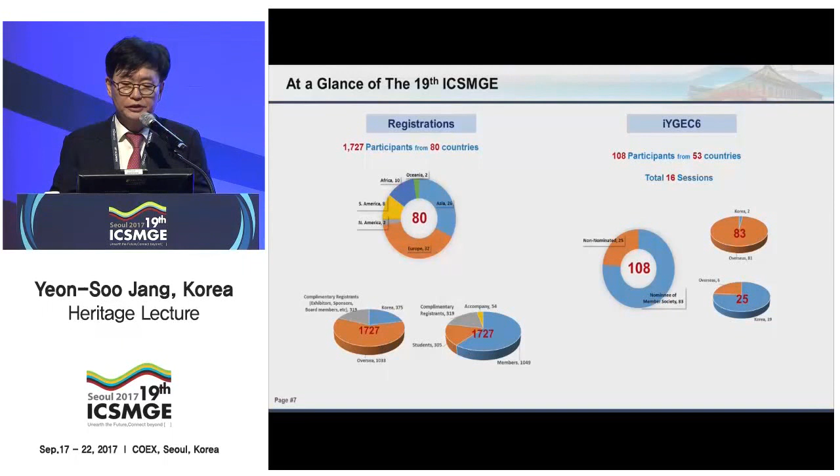Thank you. Now is the time for the heritage lecture. The topic is the geotechnical issues and the preservation of Korean heritage sites. Originally, I intended to show the beauties of Korean heritage structures as well as the geotechnical characteristics hidden in the structures, but I recognized that the time is too limited to show all of this, so I decided to concentrate on the geotechnical characteristics of heritage structures.

Korea has 12 UNESCO World Heritage properties. That is a palace and shrine built in the Joseon Dynasty, and a fortress and castle from the ancient period from AD 500. And locally, the Gyeongju and Baekje historic sites are also on the heritage list. This table shows the World Heritage list and the registered year. You can see from 1995 to 2015, we had 12 heritage structures.

So Seokguram Grotto, Bulguksa Temple and Haeinsa Temple are Buddhist legacies. And Hwaseong Fortress is a castle. And Changdeokgung is the palace. Also, number 7 is the Gyeongju Historic Site. This structure is Cheomseongdae, and we also have big tombs, the big royal tombs of the Silla period. This one is Jeju Island, which is very interesting in the geological sense.

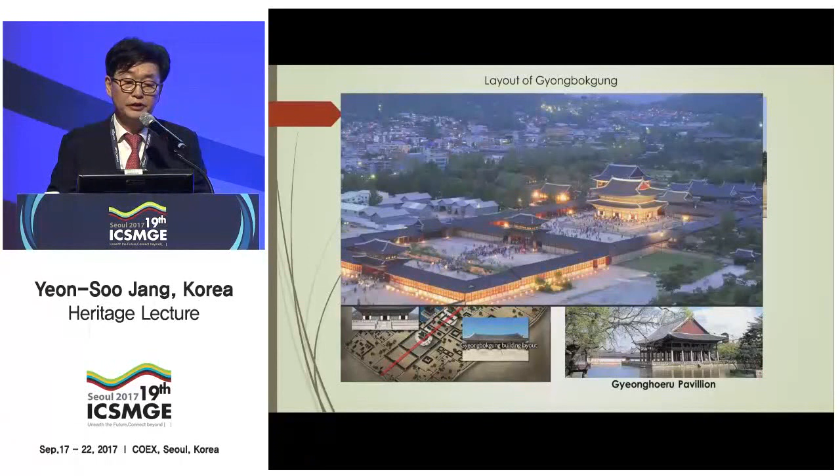Next one is the Changdeokgung Palace. As I told you, it was built in 1405. Contrary to the Gyeongbokgung Palace, in Changdeokgung Palace the gate is on the left side, and you go in this direction. Here is Injeongjeon, a similar structure to Geunjeongjeon in Gyeongbokgung, and this side is the royal family's private side, and the Biwon is pretty famous in Korean ancient architecture. It is located behind this area.

So, as I told you, its layout is not a straight form. It is conformed to the geomorphology of this area. This is Injeongjeon. It is also a two-story building on a stone stylobate.

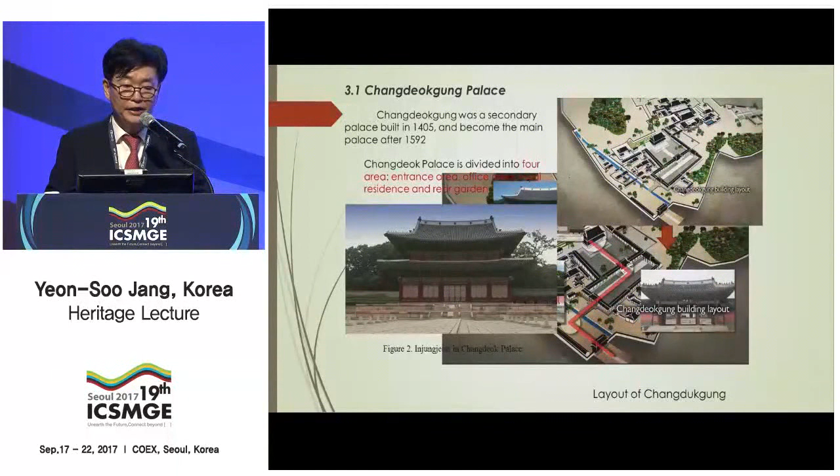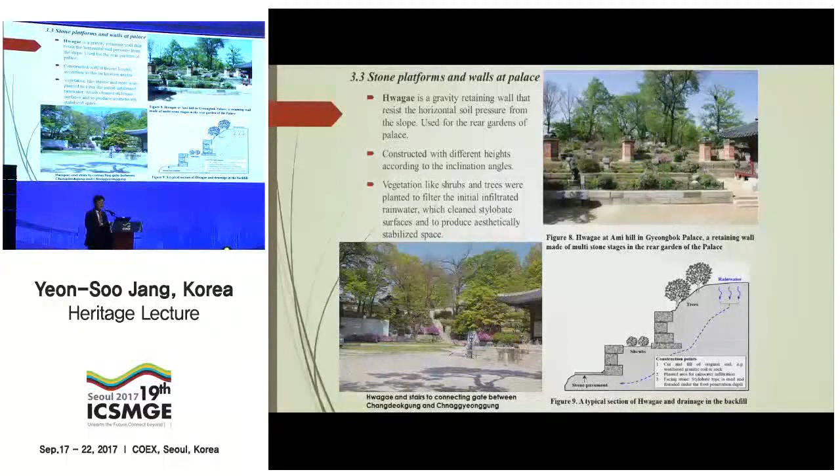Let me show you two beautiful pictures, which look like a beautiful garden, but actually it is a gravity retaining wall that resists the horizontal pressure from the slope. So these are the sections which describe both structures. The Joseon people built this kind of structure when they had lower hills in the palaces. So they put the plants, and then the soil can drain the rainwater very freely under these structures.

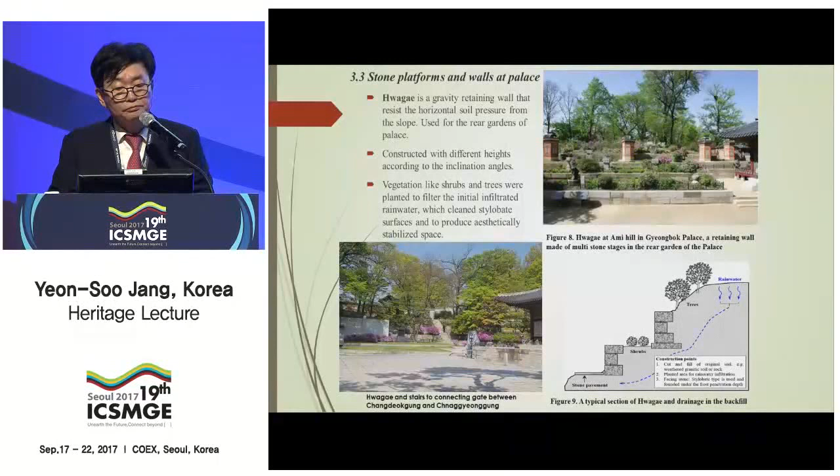What is the foundation of a palace stylobate? So this is Geunjeongjeon again. It has a very wide area in front of the hall. There is a weoldae. And here are the sections you can see. This is the palace. The foundation of a palace we call a stylobate. The Korean name is gidan. And in front, there is a weoldae. This front area is always oriented to the south or the east to have better sunshine during the daytime.

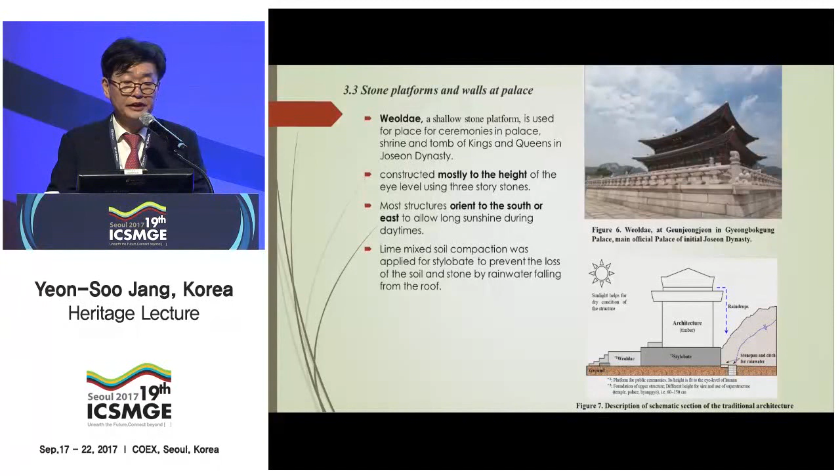And we had foundations which are a cornerstone type many times. So these are the sections of the foundation. People dig into the bottom area, which is composed of hard soil or base rock, and then they put many coarse riprap, crushed stone, and then they put lime mixed soil. Lime in Korean is ganghoe, which is a quicklime type lime.

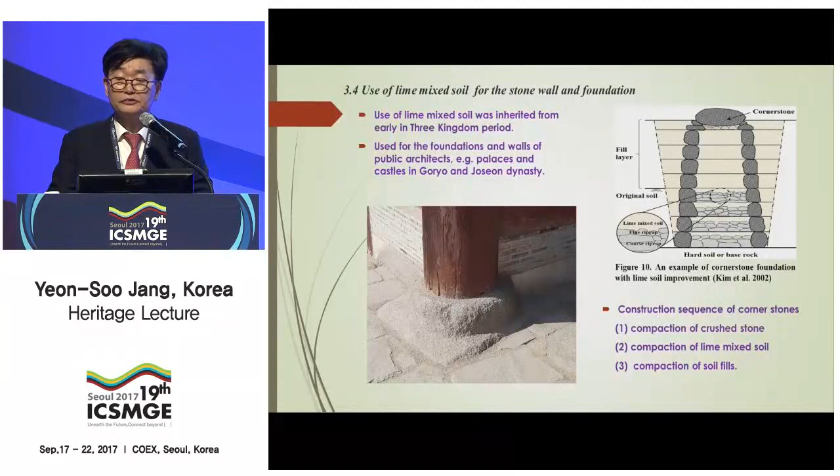And they put this lime mixed soil at the junction of the compacted layers to increase the cohesion between the layers. So up to the original soil, they put the layers in the same form, and over this in the stylobate area, they put stone with compacted soil up to the cornerstone. So this is an example cornerstone in the palace area. You can see the rows of cornerstones with the pedestals.

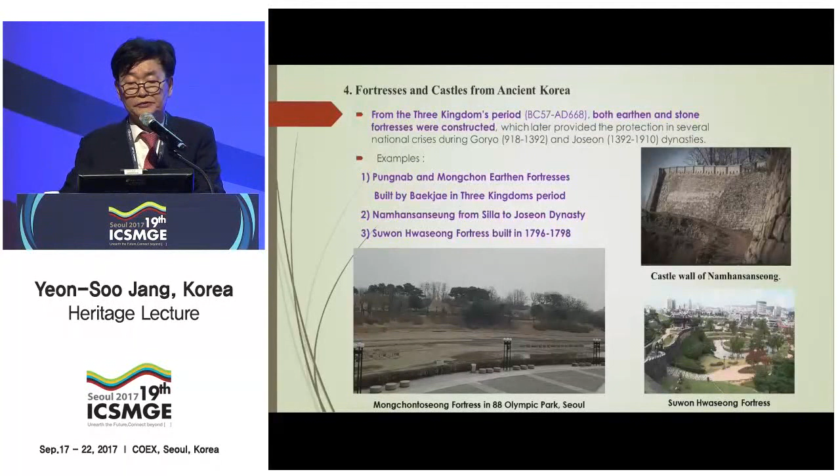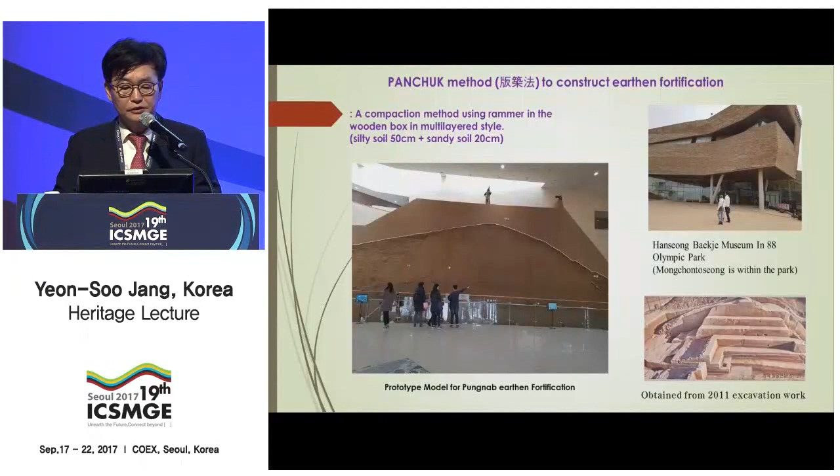Let me talk more about the earthen fortresses. If you go to the Hanseong Baekje Museum in 88 Olympic Park, which is about 15 minutes by car to the east, then inside this museum you can find this big structure. This one is a prototype structure, which is deliberately copied from the excavation of Pungnab Toseong. At Pungnab Toseong in 2011, they excavated, and using soft cloths with resin paste, they reproduced the area in this part.

What they used to make this large embankment is the panchuk method. In the panchuk method, they make this kind of wooden box and then compact the soil.

Are you curious about the sections? I bring here the detailed sections. You can recognize the compacted layers, and also the straight lines. That is probably the boundaries the wooden boxes had made.

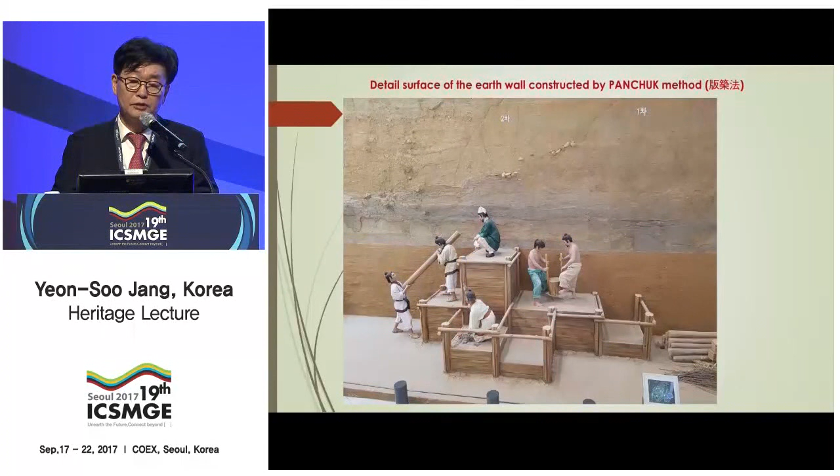Okay, how about the stone castle walls? In our country, the castle wall is made by dry masonry work, which means that we build these walls without using mortars, lime mortars. The height of this castle wall is between 4 meters to 6 meters.

And since we do not use the mortars, we had huge backfills on the backside. In contact with the wall, we used riprap, which is crushed stone, and upon it we have an embankment with soil. There's lime mixed into the soil to increase the cohesion.

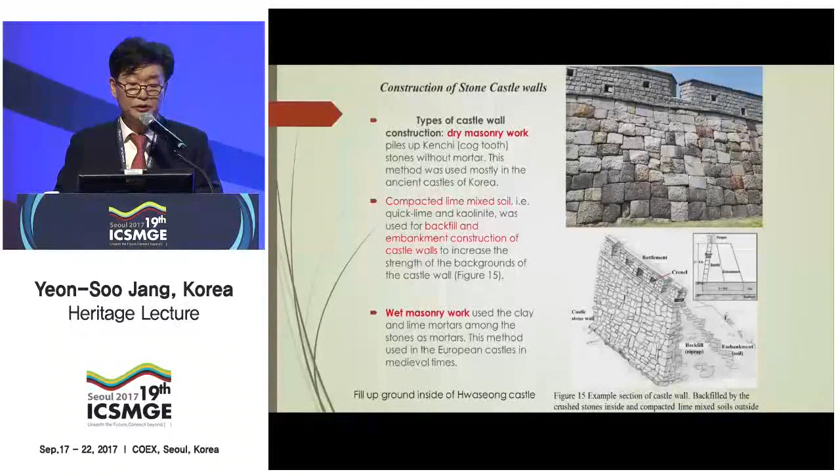Wet masonry work, that is chalsak in Korean, is often used in European castles. I bring here an example. I took this one when I made a journey to Croatia recently. So this is Dubrovnik. You can see very thin walls in this castle.

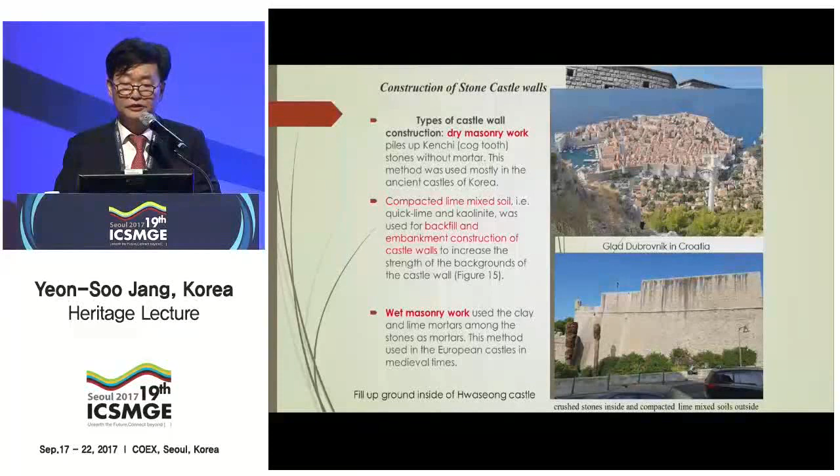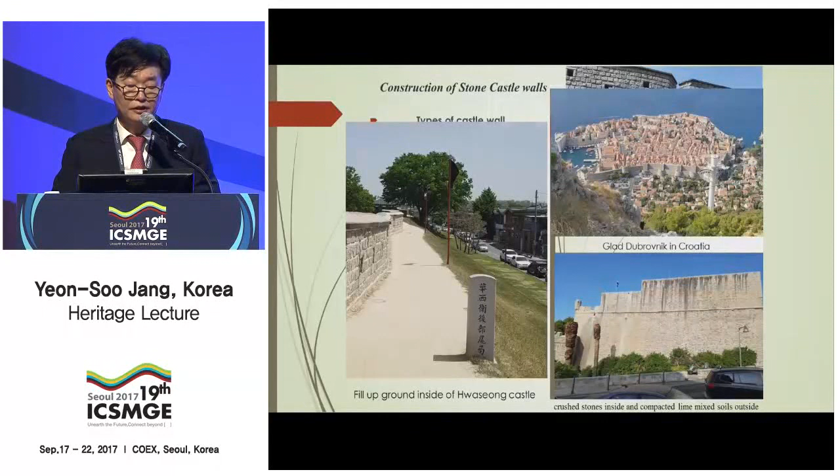And this one is the section; by looking at this car's height, this one is well over 10 meters. So they have to use mortars to make the wall. So the type is quite different from Korean ones. Here is an example of our castle wall inside the fortress. It's Suwon Hwaseong.

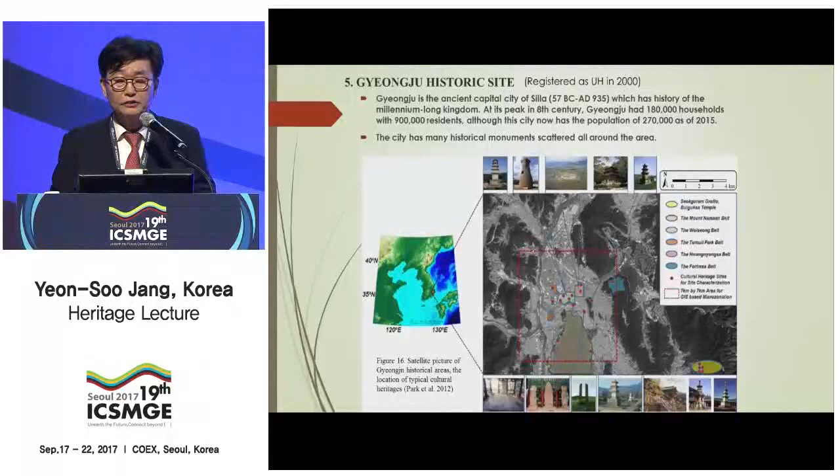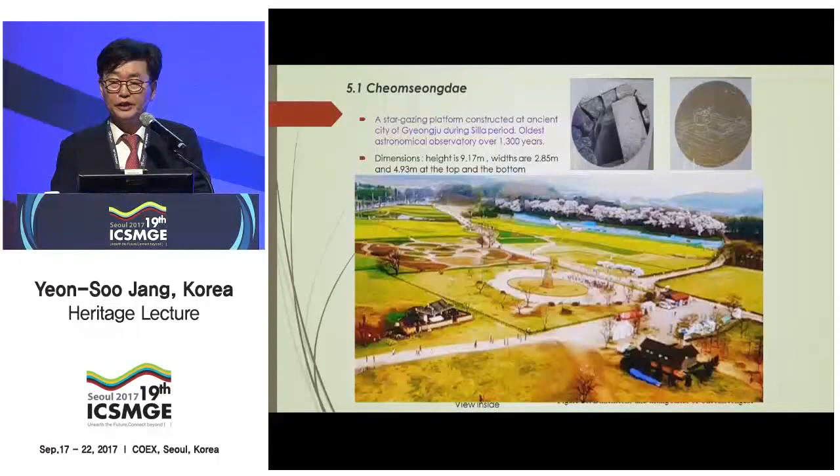Let me show you Cheomseongdae first. It is a stargazing platform constructed in the ancient city of Gyeongju during the Silla period. This is the oldest astronomical observatory, over 1,300 years old. You can see the tiny structure here, and at the back side, this is Wolseong, the capital of the Silla dynasty. It's also an earthen fortress constructed at the time.

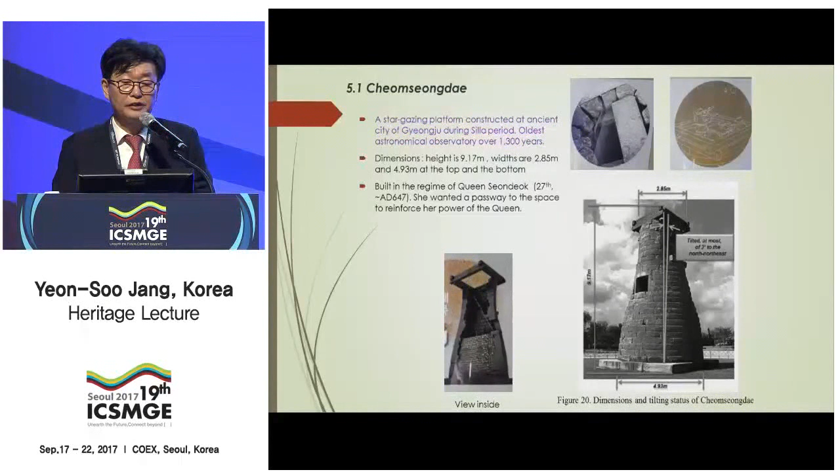This is the dimension of Cheomseongdae. It has a height of 9.17 meters, width at the top of 2.85, and at the bottom 4.93. Actually, it is tilted about 3 degrees, and this inclination seems to increase as time goes on. And this is the inside of Cheomseongdae. The fill is still at the low side of this structure. This was probably put in when the structure was constructed.

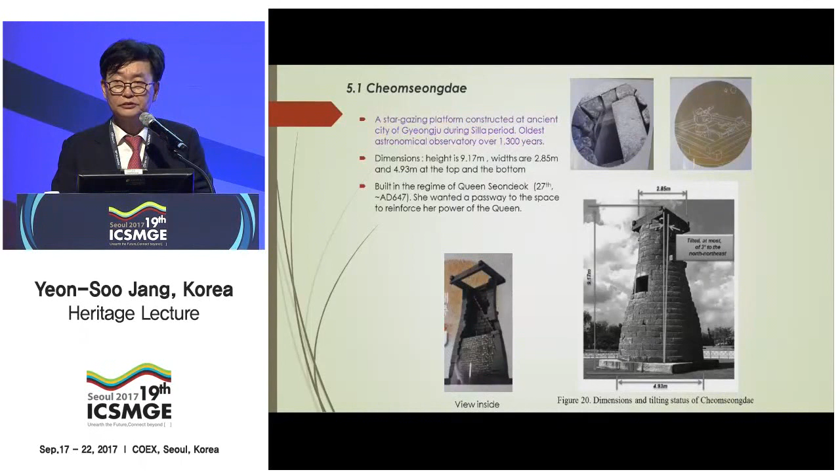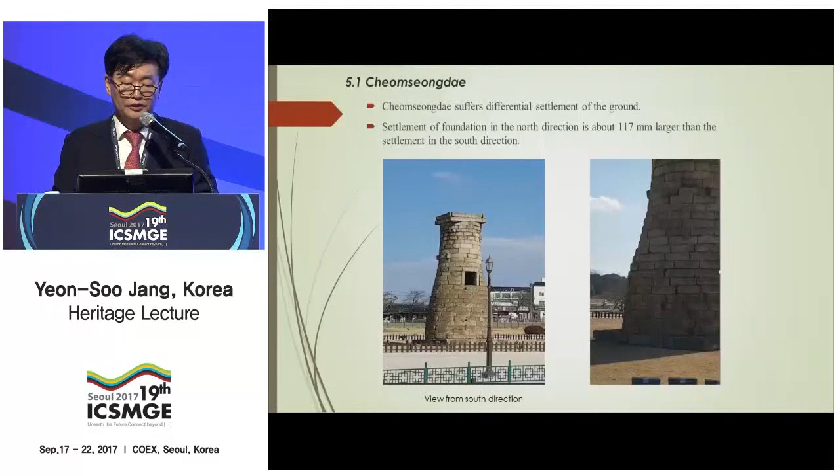I took the picture of Cheomseongdae in January this year. This one is looking at the south side, the direction where the windows are located. I can turn to the north side. I think you can recognize the big seam cracks, and this one is a little bit concave. It has settled about 117 millimeters in the north direction compared to the south direction.

So let me introduce the efforts by the team of KAIST. Actually, this is the team of Professor Kim Dong-soo, who is the General Secretary of this conference. They did a non-invasive site survey, a linear offset seismic test and a 3D DC resistivity survey. And they show these kinds of pictures.

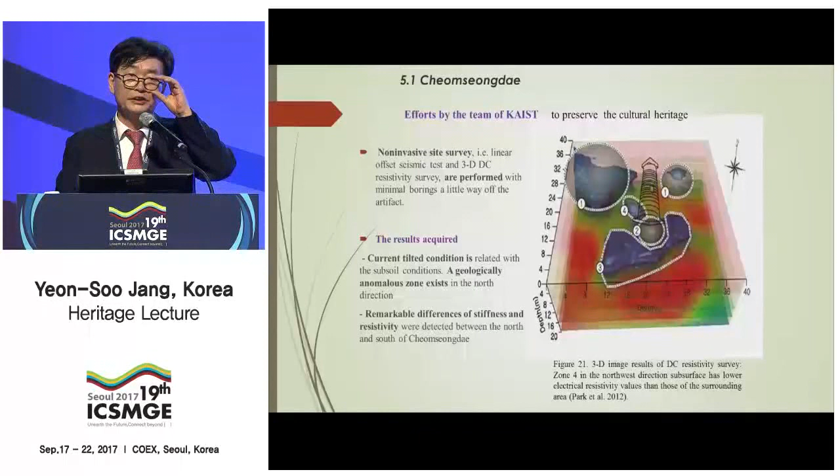Number 4 is the northwest zone. They found a very anomalous zone. They said that remarkable differences of stiffness and resistivity were detected between the north and the south of Cheomseongdae. So the differential settlement possibly came from this.

They also did centrifuge tests. This centrifuge is at KAIST. And this is the box. Inside the box, they had the option of a shaking table, so they can model earthquake conditions while rotating this centrifuge box.

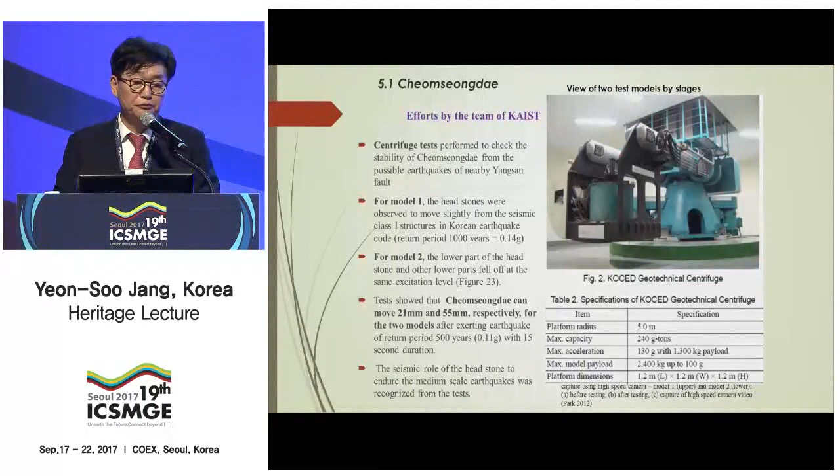They had a Cheomseongdae model in 2 forms. The first is exactly the same as the prototype Cheomseongdae. At the 9th layer, they had a stone reinforcement, and at the top, a square reinforcement. Also, they put flat stone planes, which were used as desks when people looked at the sky. So this is the model in the centrifuge box.

And this one is made without reinforcing stones. What they found after the test: the original form resisted very well, but the model without the stone reinforcement was damaged a lot. They converted the settlement as if the prototype received the same earthquake forces. They said it would move 21 millimeters for the first model and 55 millimeters for the second model.

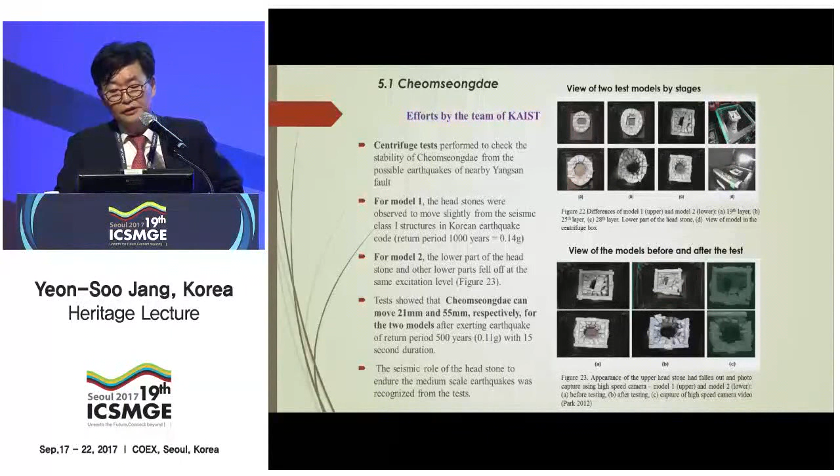They used an earthquake with a return period of 500 years, equivalent to 0.11 G over a 15-second duration. We had an actual earthquake about a year ago, exactly September 2016. Its magnitudes were 5.4 and 5.8. That's approximately equivalent to 0.12 and 0.14 G in Gyeongju.

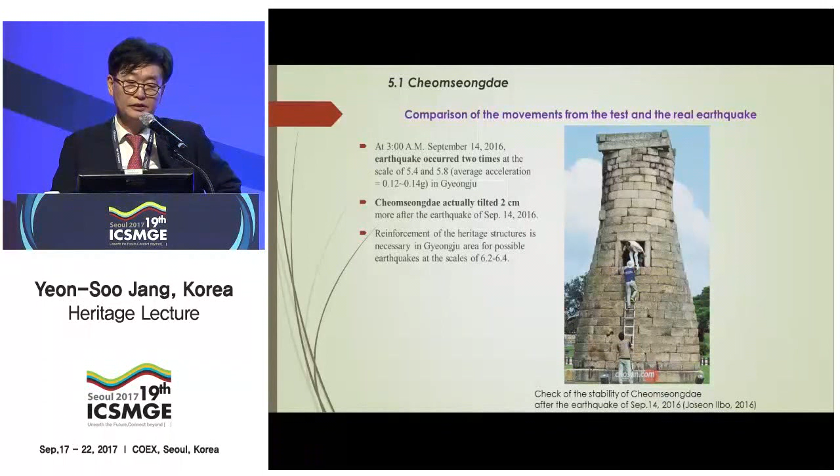This one shows the people investigating the damages from the earthquake after it finished, and they found that Cheomseongdae was actually tilted 2 centimeters. Surprisingly, it's quite near to what Professor Dong-Soo Kim modeled in centrifuge tests. So reinforcement of heritage structures is necessary in the Gyeongju area for possible earthquakes at scales of 6.2 to 6.4, which might happen in the future in our country.

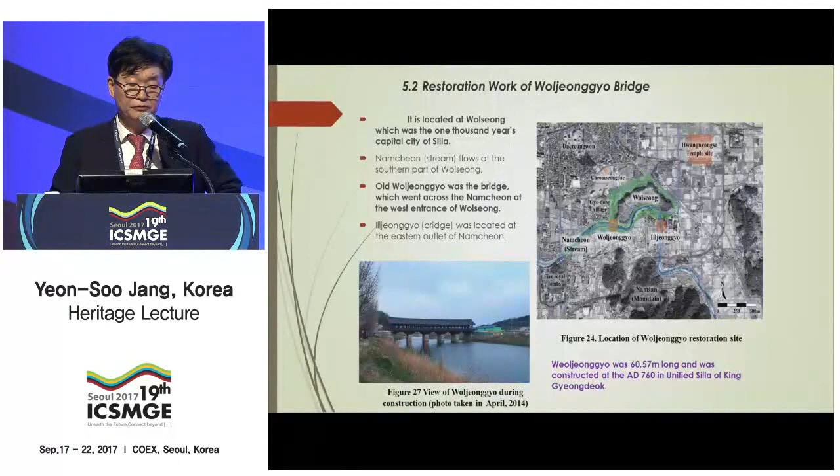Now, I want to show the restoration work of Woljeonggyo Bridge. This is Gyeongju again. This is Wolseong. I told you that this was the capital city of unified Shilla about 1,000 years ago. At the south part, there is a river called Namcheon Stream. At the time, it is thought there were 2 bridges, Woljeonggyo and Iljeonggyo. This Woljeonggyo Bridge is being restored now. This picture is the status of the bridge in April of 2014.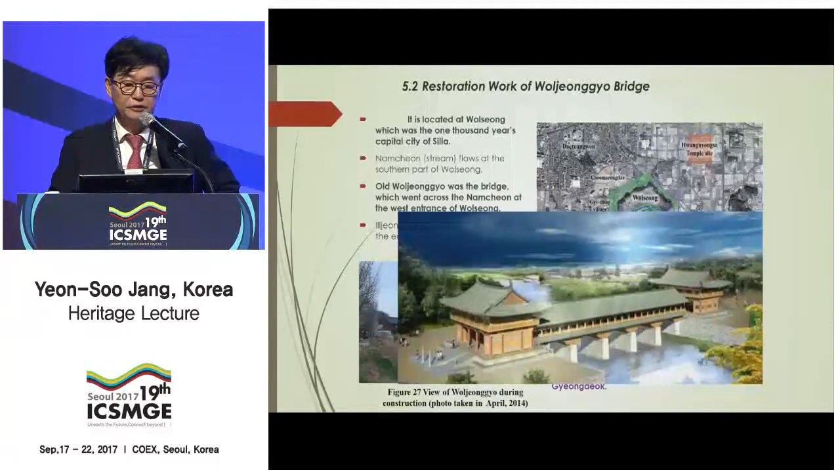We expect that this bridge will be finished in 2018, next year. It is a housed bridge, and they also have a house gate at the abutment area. Why did they build it in a housed form? They found at the excavation site many pieces of burnt wood and roof tile around the bridge. And this is the foundation site when the excavation work was going on.

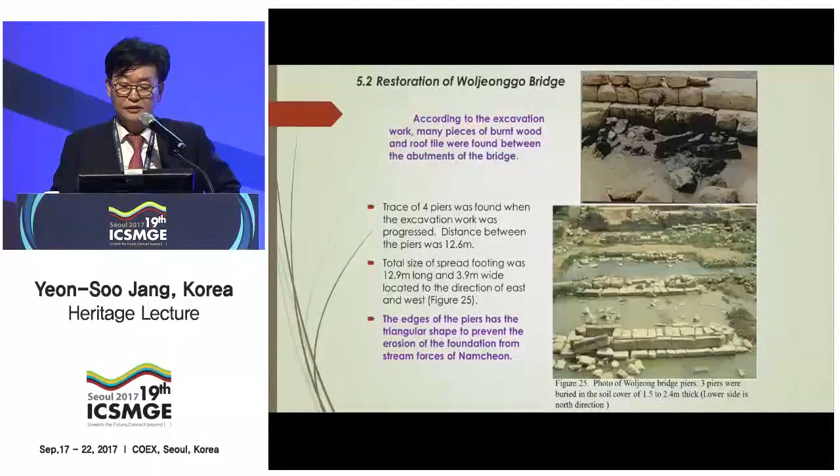From the north direction, 4 piers were located, and this part was buried by thick soils of 1.5 to 2.4. At the number 4 pier at the south side, they found a scour protection work. It is a wood latticed form with stone put inside. It's amazing that at the time they thought about this kind of structure to endure the forces of stream power.

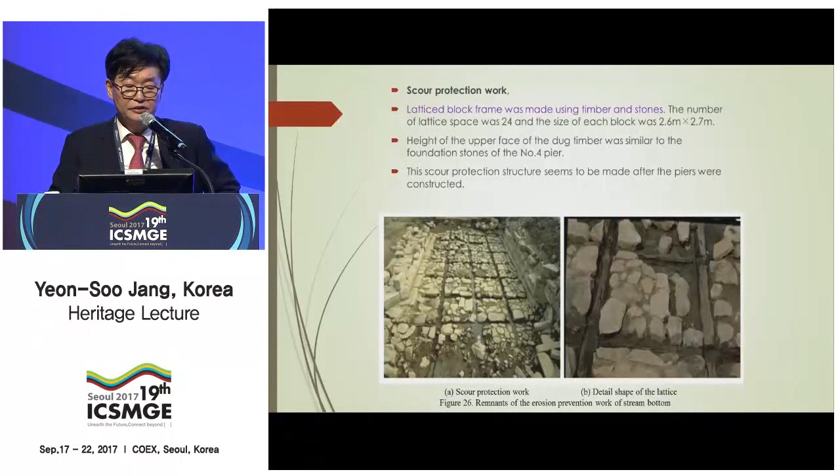When they built this bridge, they did a geotechnical survey, and they found a sand layer 2.0 to 2.8 thick with an N value of 25, and a gravel layer 3 to 5 meters thick. So you can think it is a pretty good condition for construction of the bridge. And this is the abutment area found when the excavation was going on, drawn again in graphical form.

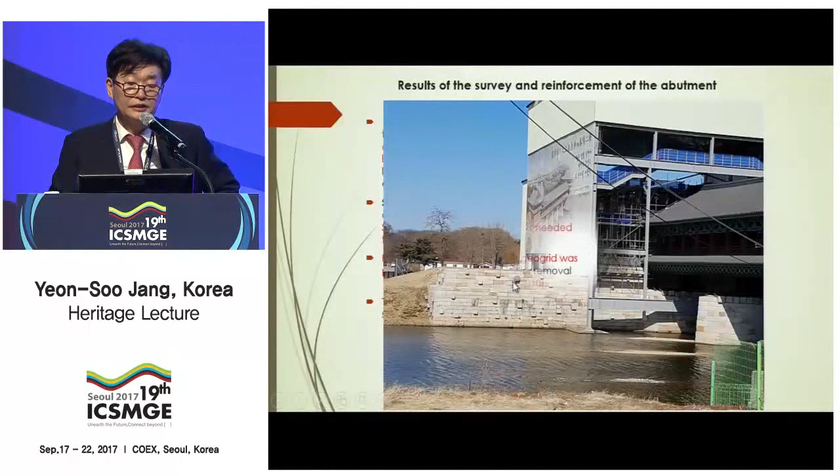You can find many dots here, the dots in front. This is a stone reinforcement, like the reinforcement structures of recent years. If this stone reinforcement is exactly reproduced when the structure is constructed, is that enough for enduring the backfill forces? It was not. So KICT, the Korea Institute of Construction Technology, had a nice exhibition box behind the hall. They suggest reinforcement with 6 to 7 layers of geogrid in this abutment.

Now I bring here video clips of the area. This is the bridge being built now. And this part is the Wolseong fortress. You can see that this part is being explored now. What is surprising is that they found the skeletons of 2 human bodies excavated at the bottom of the southwest wall. This is exactly the wall. In May 2017, you can find the 2 people.

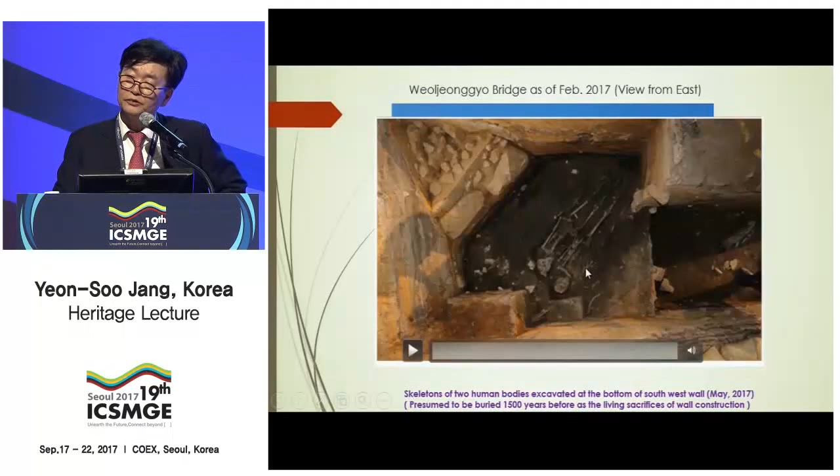We presume that they were buried 1,500 years ago as living sacrifices for the wall construction. In a superstition, they believed that this earth wall would last forever if a living sacrifice was given to the foundation of the wall. Does that really help this wall survive these days?

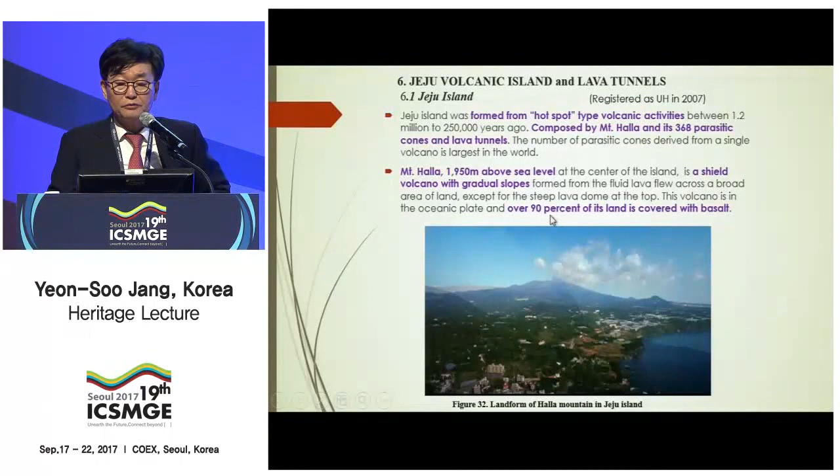The final topic is the Jeju volcanic island and lava tunnel. It is a hotspot type volcano. It is not located between tectonic plates. It is composed of the main summit, 368 parasitic cones, and the lava tunnel. 90% of this land is covered with basalt. So you can see the scenery.

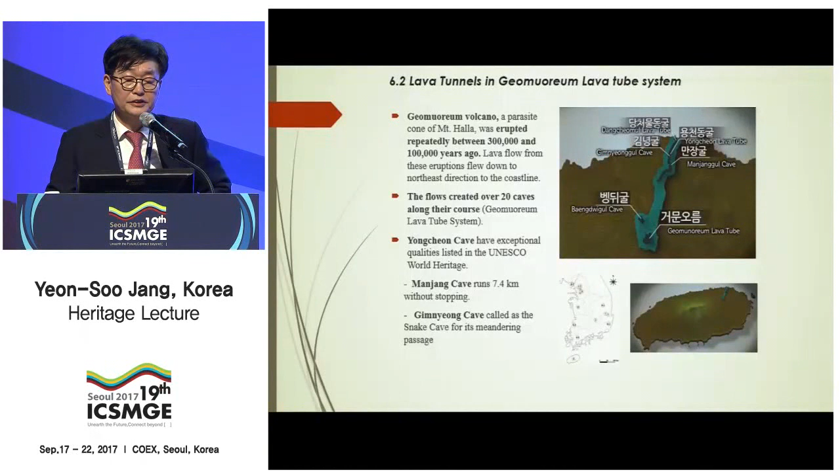Jeju Island is located at the southern part of Korea, and in the northeastern part of the island there is a lava tube system, the Geomunoreum lava tube system. It has many caves. It was made 300,000 to 100,000 years ago. This is the picture, so you can see parts of the lava tube. In some places there is a huge lake inside, so you should use a boat to go around this area.

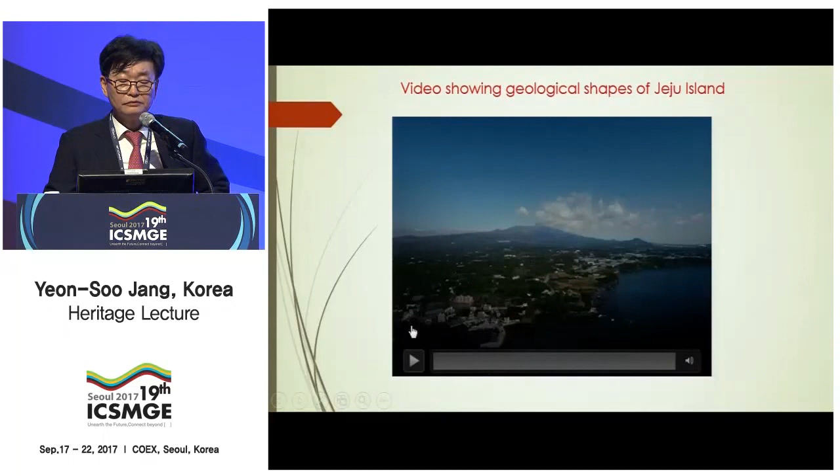Even though this is a lava tube system, you can still find speleothems, made from the calcium carbonate sands at the ground surface which infiltrated into this lava tube. So you can find a lot of these. Finally, I show you the video which shows the geological shapes of Jeju Island.

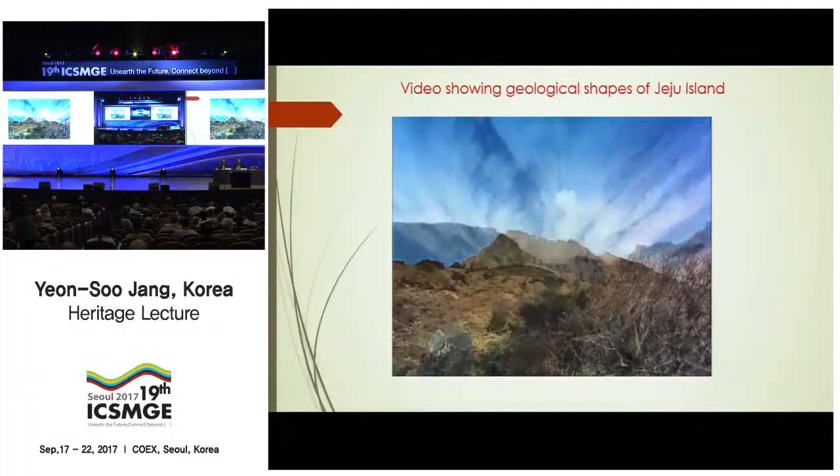This is the summit, Baeknokdam Lake, which is dry most of the time, but when rainfall comes, it makes a water table. This is one parasitic volcano, Gamunorum. The inlet of the Gamunorum lava tube, the speleothems they made, another form.

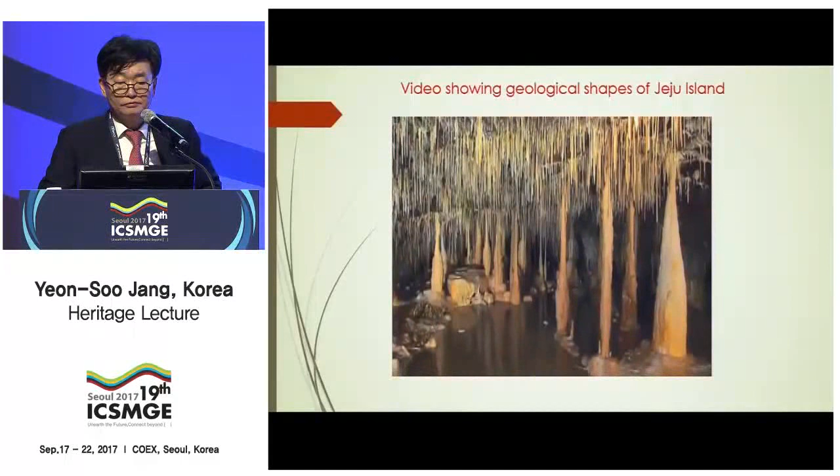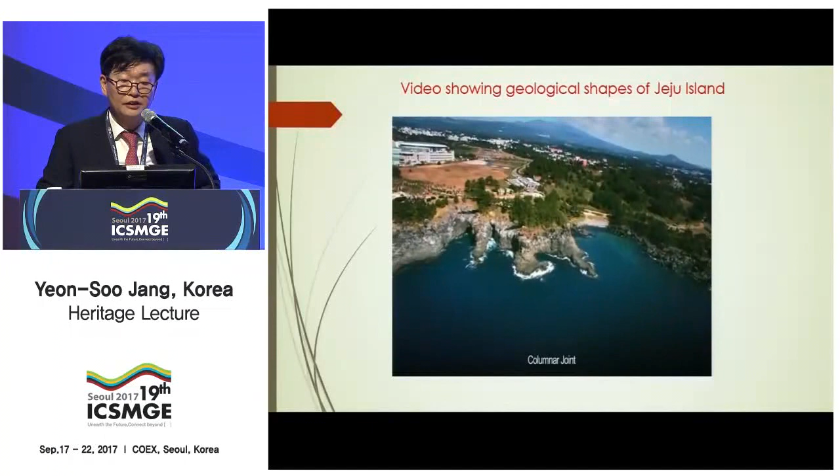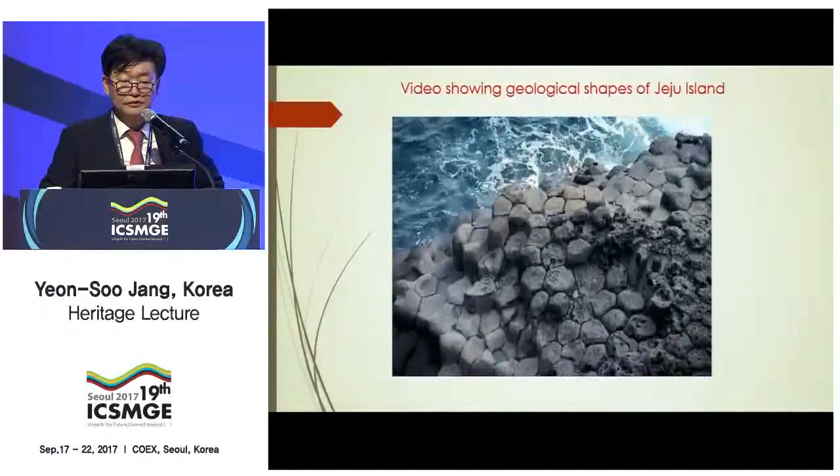And the waterfalls, and columnar joints. Columnar joints exist in many areas on this island. Some details of the columnar joints. And a parasitic volcanic form, the Seongsan Ilchulbong.